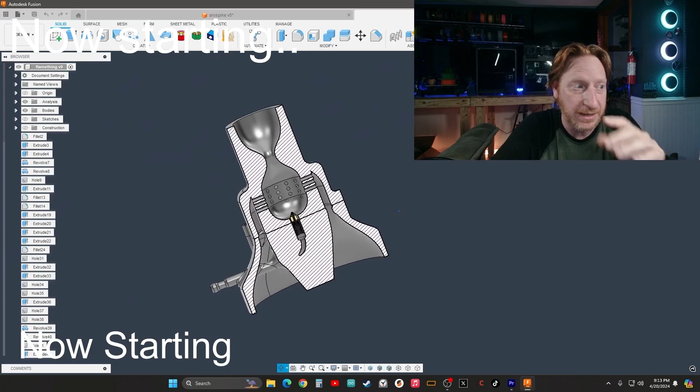Nozzle heats up and the plastic it flows. A creation takes form as the live stream goes. Heart of a maker with a tech-savvy show. Designs in the making, see the hotbed aglow. It's shenanigans 3D on the digital stage. With each layer printed, he's the maker. The mage.

Let's start the show. Layer by layer, we watch it grow. A twitch in time with shenanigans flow. Chaos reigns with a fiery glow. We're live. We crash.

Watch closely as the filament spins. A wild ride where the line between fails and wins. Accidental art when the plastic rebels. Shenanigans 3D. He's breaking all the levels on the edge of tech. Where the sparks may fly. In the streamer's den, there's no limit to the sky.

Every stream's a gamble, roll the fiery dice, pushing limits, bending rules, not one to think twice. Heartbeat pulses with each print he creates, while the chat's wild wonder and suspense they wait. Rising with the flames in the shenanigans game, printing out the future, no two prints the same.

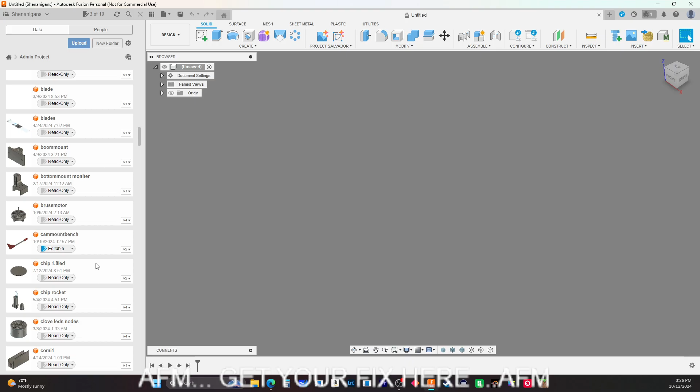Let's open up the chip itself. Can't remember what I called it... Chip 1.8 LED, no, that's not it. I made this, I think this is it right here: Chip, final V3 chip. Is this it? Yes, it is.

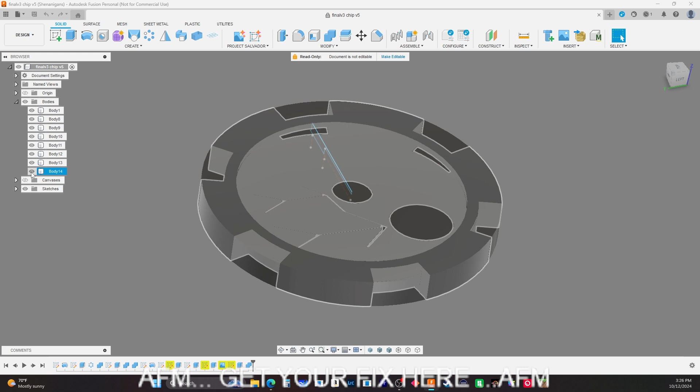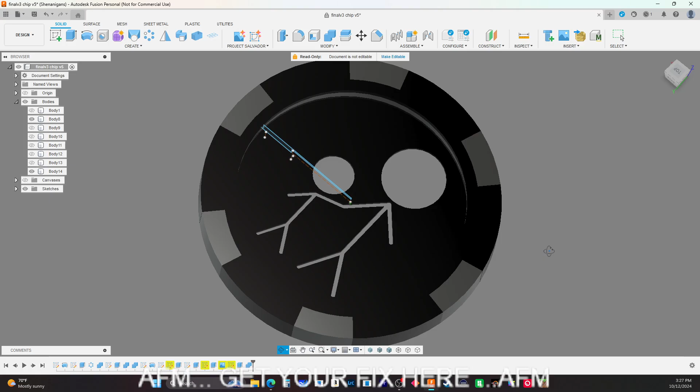I did my thing internally in the program, so we'll just ignore that. The one that I will be putting up will not have this in here, it will be solid for y'all. Okay, actually, let's do that right now. Let's do it.

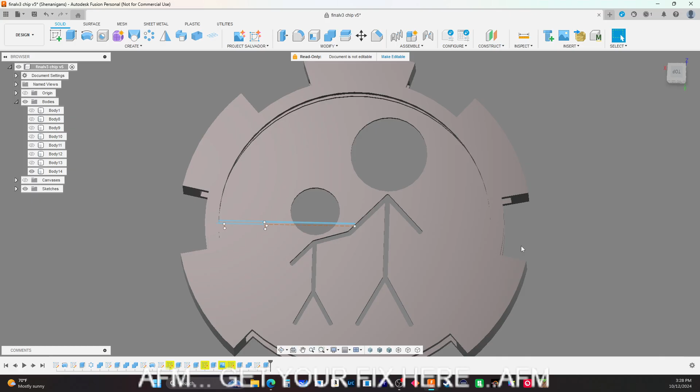What the heck? Oh, I know what I did wrong. I forgot to include all this stuff.

There we go. There we go.

It's a lotus flower candlelight holder. Put a copper cup as a buffer.

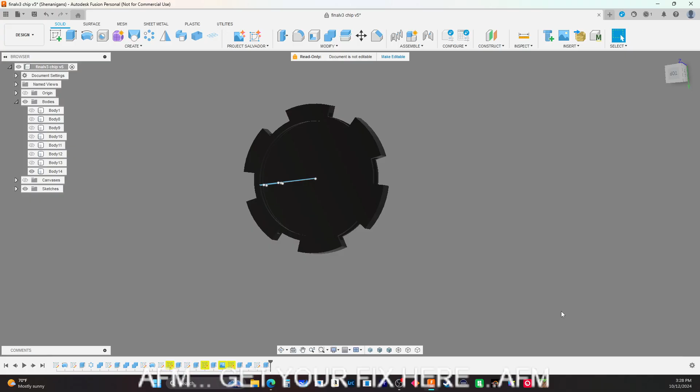Nice. All right, so this is the main structure of the chip. Notice how it's all hollow and there's a bunch of voids in here. That's for a reason. This is your dark. All right, so this is your black.

You got your Revo on your Versa. That's a pain in the ass.

Yeah, came with no instructions. Don't you love that? But then again, would you have read the instructions if it did? I probably wouldn't have.

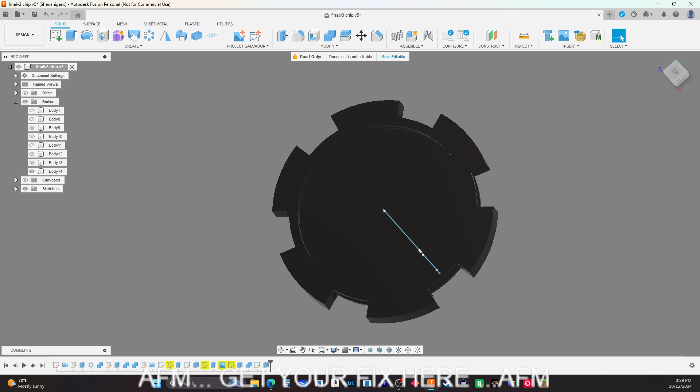Why is my face not... Where's my... come on, button, work. Click. There we go. Okay.

So this part here that you see, this is the dark one. I think this is like a 4-hour print. There's only one of these in existence, minus the guts that I have.

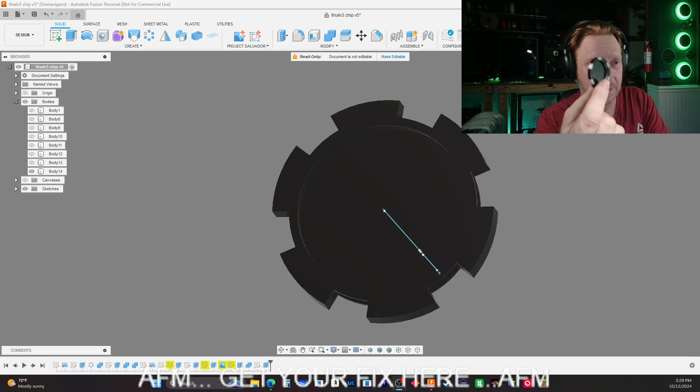K2 Kevin is the only one that has one of these. I tried to get one done for MakerDeck to hand to Pez Liz, so I got MakerDeck Pez Liz chip, but I just didn't get it done in time. I'm a little bummed out about that, but hey, next event, right?

So yeah, here's another one I did with a purple, and I can't remember what I used for the dark, but what you see up here on this, they had a disable thermal runaway, all because it's a PTC thermistor.

Oh well, it's up and running now, right? It's good. A friend of ours that comes into your chat just bought a new Prusa XL, and he sent me a picture of his first helmet print on it, and it keeps getting layer shifting on him. Like it gets up so high and it's shifted quite severely.

I keep telling him it's his belts. Something's either rubbing or something, because he sent me a sound of it, and it sounds like somebody's playing like a cello when it's going off. So something's going on, yeah, layer shifts.

The last layer shift I had was on the Sovol, and it kept layer shifting on me, and I was like, what's going on? And I found out that I'd never tightened my belt. My belt was like very, very loose. So they're all tightened now, and it's been printing like a charm.

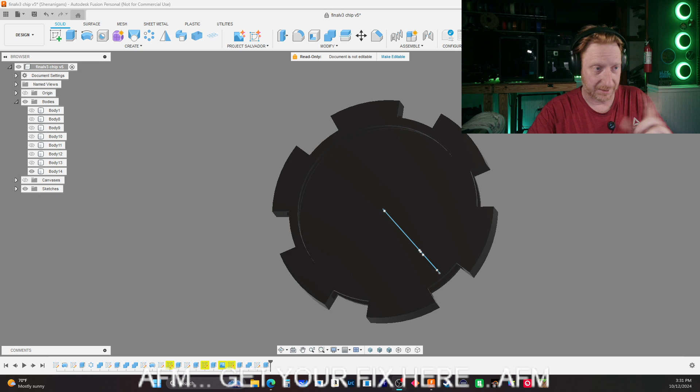So yeah, this is the black, you can use whatever color you want. I used the PETG on this, the black PETG, and the light doesn't shine through. The light does shine through on this one.

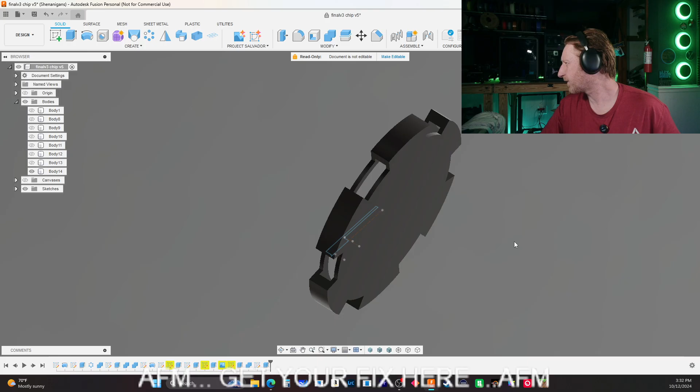Now the chip that you see Kevin squeeze in that little clip he did, the whole chip lights up, because I used a filament that I did not realize was transparent. There's a funny story about that filament, but I can't remember what filament this is.

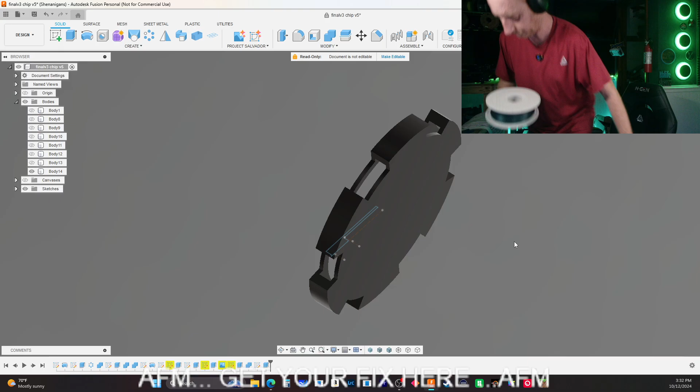This is the PA Galaxy. I did not realize that this stuff is slightly transparent when you print very, very thin with it. So yeah, the chip that K2 Kevin has came from this spool right here.

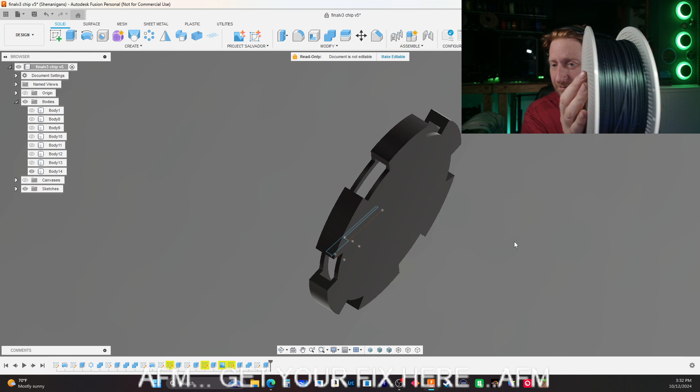Oh, awesome. This is if any of y'all were lucky enough to get a chip from Pez Liz, or anyone that was made by Pez Liz, she used this filament. And I fell in love with that filament, and somebody in this channel sent me this filament.

And then I ended up making the light-up maker chip out of that filament for K2 Kevin. But like I said, when you squeeze on it with that one, the whole chip lights up, so you can see right through it. Yeah, Pez, I love that filament. Love that filament.

So this is the base. We need this, okay? And then we need the other body, which is this one. This body is the actual light ring.

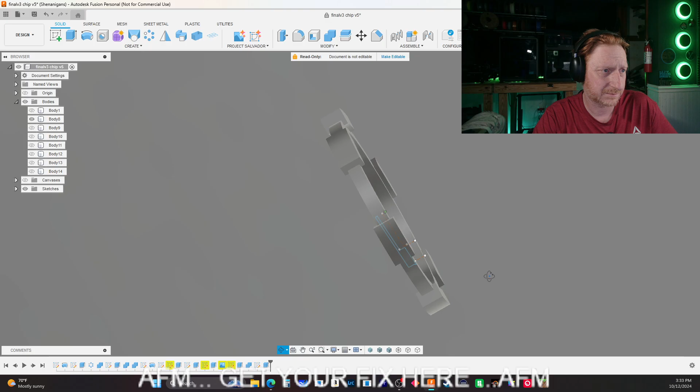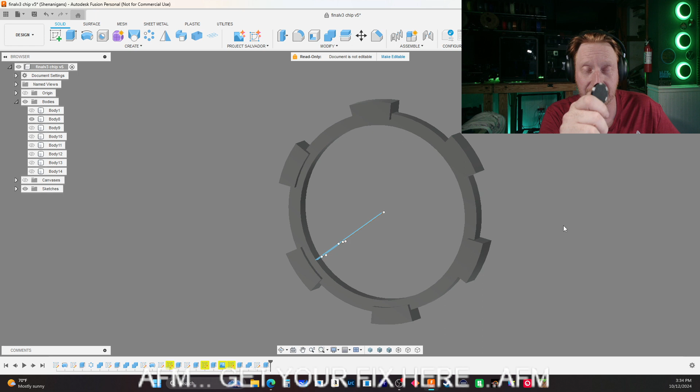This one, the one I made for K2 Kevin, I used... let me find this. Do I have any more of that filament left? I think I do, actually.

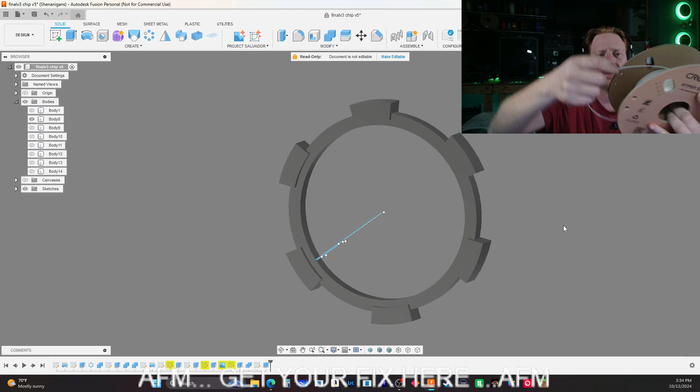Is this it? Yes, from Creality, their Hyper series. I use this for my light boxes. It's very, very opaque, like it's very white. It's Hyper PLA white, but when you print with it, it really allows the light to shine through on it.

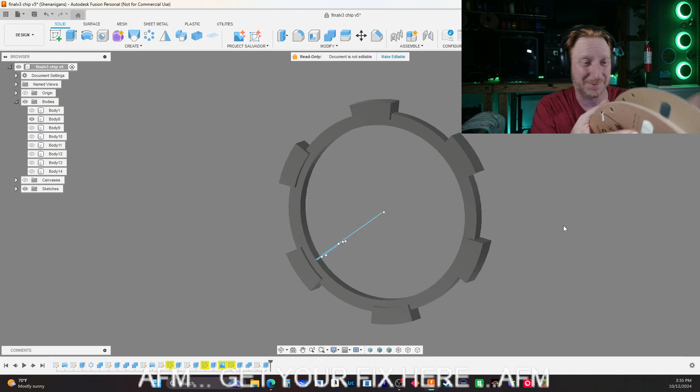And this is great for light boxes. I've used a bunch of different ones. I'm no expert, no, I'm no Pete on the light boxes. Pete is just a master on light boxes, and to be able to see his creations in person was just awesome.

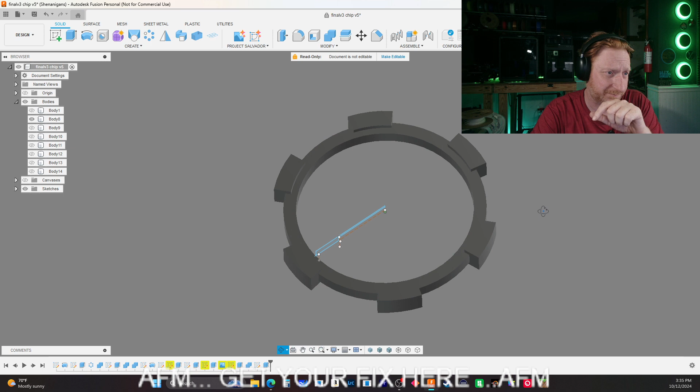But this ring is the key right here, okay? And then the other thing that you need, do I even have it on here? Yes. This is the cap.

Now if you look on the cap, we got this little lip right here. Well actually, here, look, you can see how transparent that is. This is that galaxy from Bambu Lab. You can see how transparent that is.

So that's why when he lights it up, the whole thing lights up. I was not expecting it to happen.

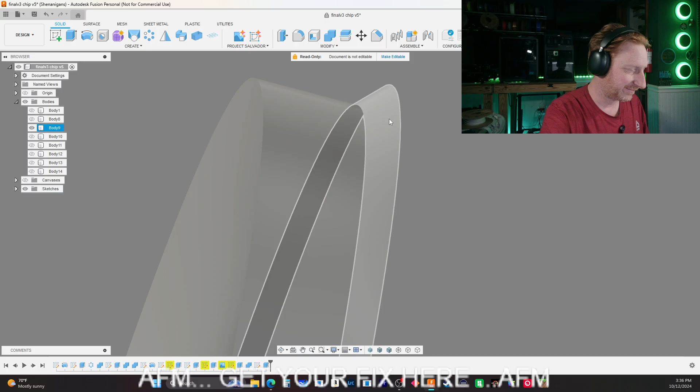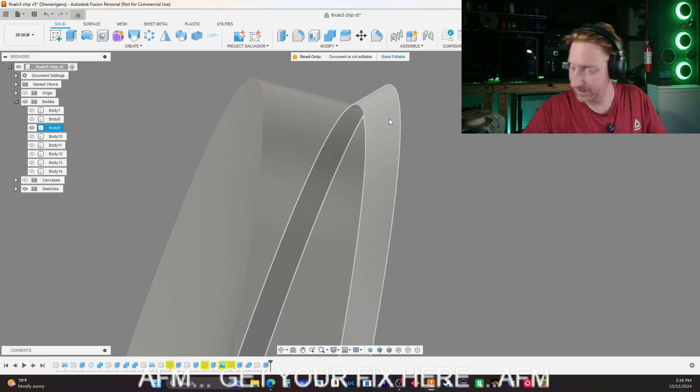When do we get a burning maker chip? I got something, I have something in the making. Yeah, I got something in the making. It's going to be a challenge for me, I can tell you. But I got a new maker chip in the making. Hopefully I can get it done for Murph. But it does require some coding.

Okay, so this little chip, this little flapper thingy here is very, very important. That's what locks the lid. That's what locks the cap.

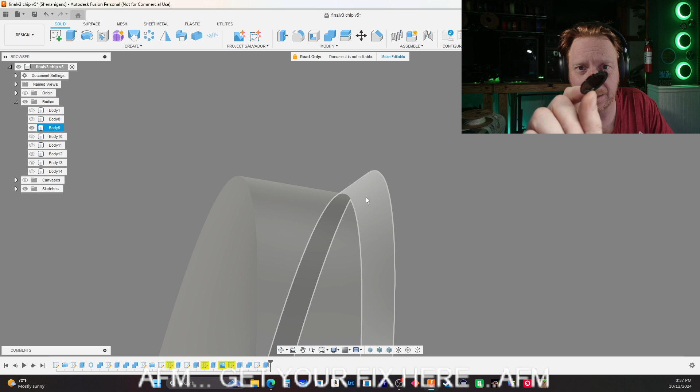Okay, here's the cap. Will it fit on this one, or did I? No, it won't. It's what locks the cap in place on top of this. It will go in here right now because the battery's not going to come back out now.

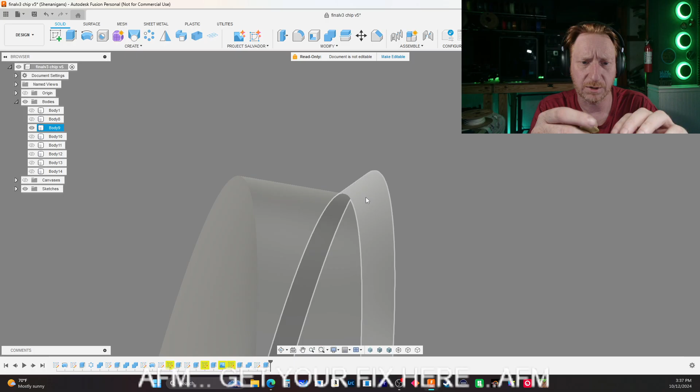There you go. But all you do when you get all these printed, we'll show one in Bambu Lab. You put the circuit board and the LEDs inside. You can glue it down.

You can line up the LEDs with your transparent stuff. And the cool thing about it is we have that transparent ring going around the whole inside. Okay, you put your battery in. Obviously we can't put this battery in because this is not the correct battery. I don't know what I did with the other battery, and I need that.

But you take the cap and you make sure that you can see how that is, there is a dent in there, right? So the battery will actually fit right inside this little cup, and that's important. The battery will fit inside this cup, and this little, see if I can turn, there you go.

That little gap right there, that gap is where this wire goes across. So there's a spot for that gap. This is very, very thin in here. This is only like a 2-layer print. Same with this, this is only a 2-layer print. There's only 2 layers on here. And that's 2 layers with all that.

But this, I have a bunch of these. I'm hoping this is the correct one, but I think it is. Yeah, oh no, this is the smaller one, but you'll get the idea. It will snap in place.

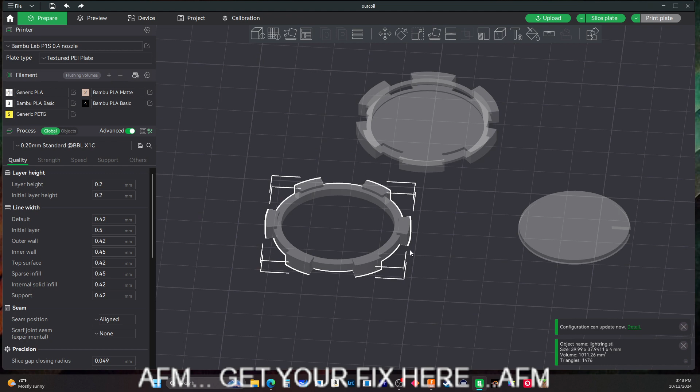The nice thing about this is if you run an AMS or MMU, you can do your logo and your QR code face down. Make sure this is centered. So we're centered on that ring. This is the light ring, we're going to center that. And then the cap is just going to stay off to the side.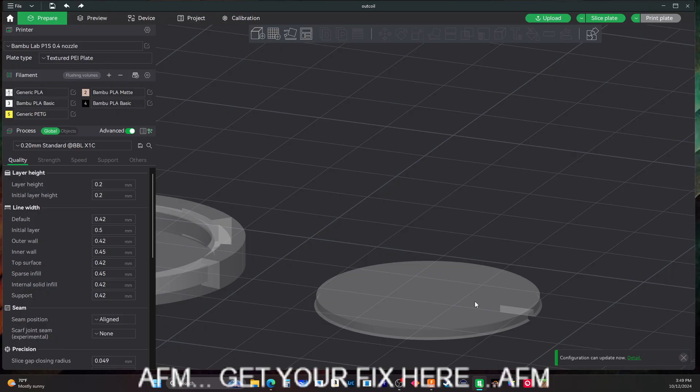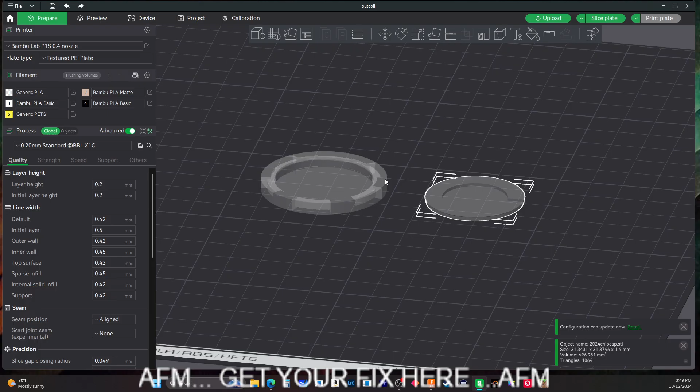Okay, make sure the cap is printed this way. You don't need any supports or anything for this little edge on here. Okay, so you want the flat side down—no, the QR code side down on that little cap. I am working on one that is going to be, like I said, printable for those of you that do not have an MMU system.

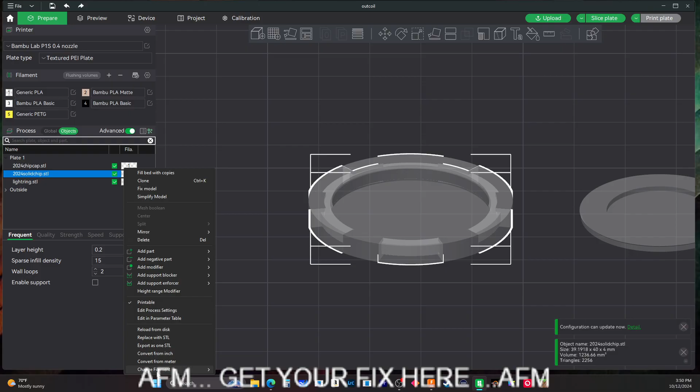Now, just like all the other chips, we are going to go into objects, our solid chip, which I named solid chip. It'll probably be different when I upload them. The solid chip, we'll change it to whatever color, we'll say black. We'll leave our cap as the same filament. And then our light ring, we're going to change it to this one, our transparent or clear filament, whatever you use that will allow lights to transmit through it.

As you can see, the ring here, that's the important part, because these LEDs are not facing outwards, they're facing straight up. So as much light as we can possibly capture is what this ring is for, and then it will transmit it out.

The next version I'm making of this, the one I've been working on that's going to be mass produced, the LEDs will be facing outwards. Okay, that's a whole different type of circuitry than what we have on this. It's somewhat the same, close to the same thing, but instead of having an outer ring, our outer ring weaves, and then there's a smaller pad on the inside.

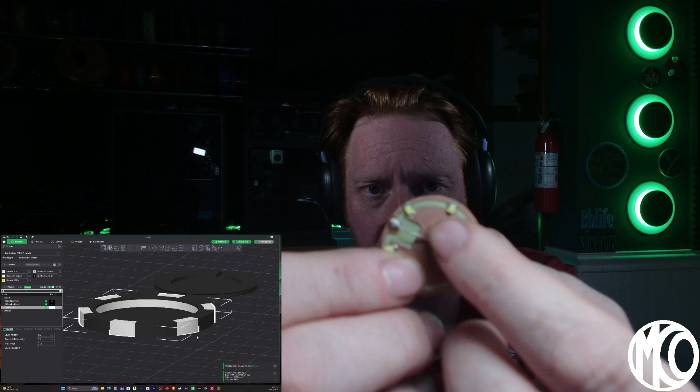But they are all getting custom made for me from PCB Way, and I'm using a very, very thin flexible circuit board, and I think it's only like 0.3 millimeters, something like that. It's very, very thin, flexible, and it will actually go in here and be glued down.

Glendon, how are you doing, my friend? We're going over the maker chip. This is the heart of it right here.

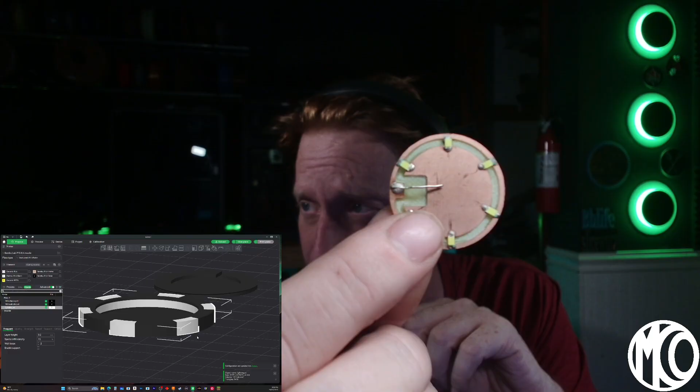The one I'm going to mass produce, once I get those in from PCB Way, will actually have a coating over top of this, so when we put the battery down, we're not worried about it with the new style I have. The LEDs will be the same LEDs, but soldered sideways and firing outwards, giving a bit more light output so we can do deeper colors like this. When we tried it with this one, it wouldn't go through that dark color. It would go through this one no problem, but not that dark one. But with the side firing LEDs, most likely it will.

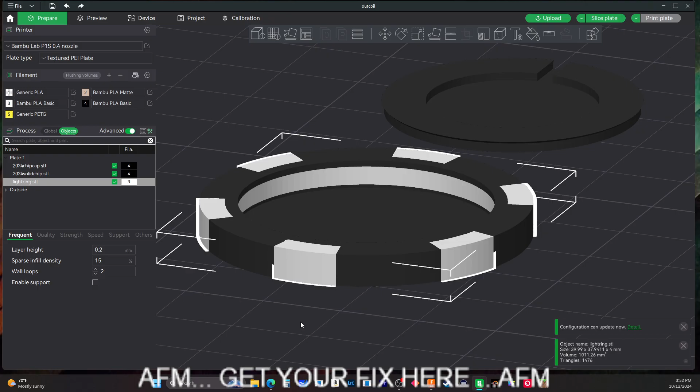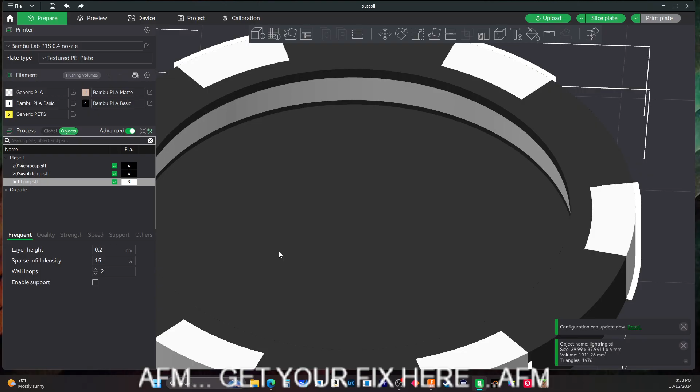Alright, so just like all the other chips, we're going to take these, minus the cap. We'll get rid of the cap for now.

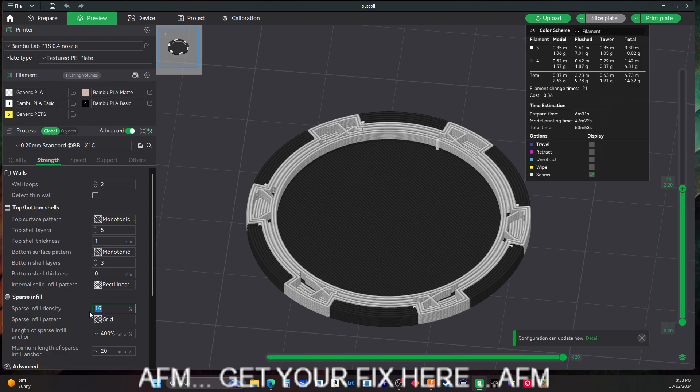I played around with adding sugar to my resin once, and I added sugar and potassium nitrate to a vat of resin once. That didn't turn out too well. It burned like a son of a gun. Yeah, it didn't turn out too well. It made a bunch of white smoke. I did not want to stand near it.

So we'll slice it to double check it, and let's turn off our seams. And that looks good.

This is our light ring. But you can see how thin this is right here. This is only like, I think it's only 2 layers. There's, yeah, 1, 2. Yeah, it's only 2 layers. So the center of this is only 2 layers.

Yes. Same here, it's only 2 layers. Same with the cap here. That's the center of this cap, only 2 layers. That's what I had to do to get it down to 4 millimeters.

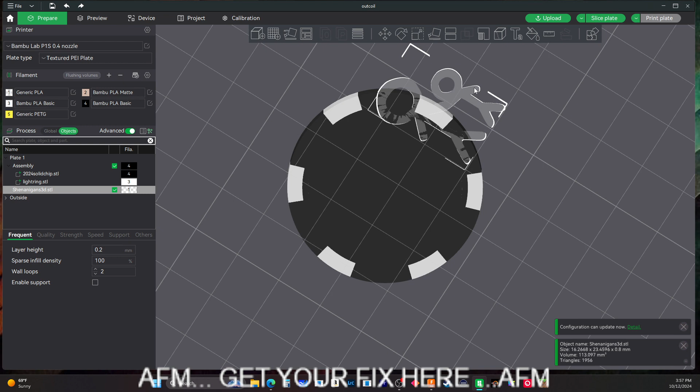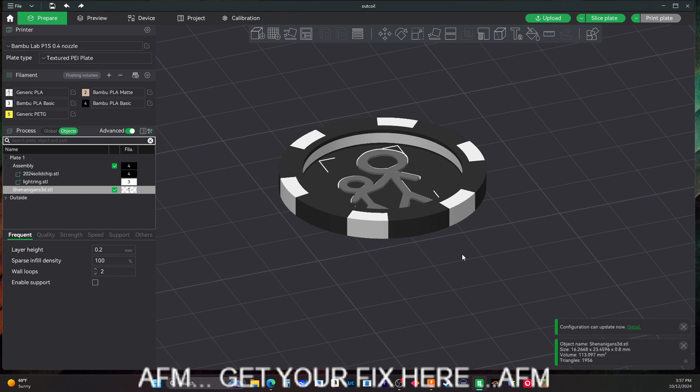So this drawing right here, go back to the big screen. This stick figure was actually made by K2 Kevin. So K2 Kevin did make a chip for me. I don't have one, I had one printed, I don't know what happened to it. But K2 Kevin did make a chip, and this was his design. I used this on some of my chips, and then my fire chips, I did something different. But you will need to make sure this is not sticking up through.

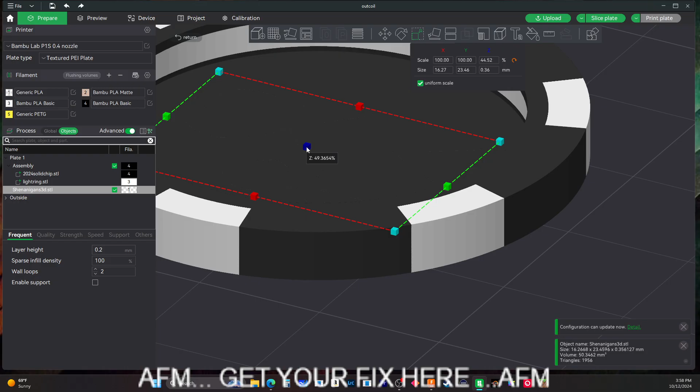So if we do the scale on this, you can take it up 2 layers. Remember, it's only 2 layers, so you can take it up 2 layers. But we'll just keep that down where it's at right now.

And if we select it, we'll make sure you can change whatever filament you want. I'm just going to do the white just because. And then we'll merge this in with our assembly.

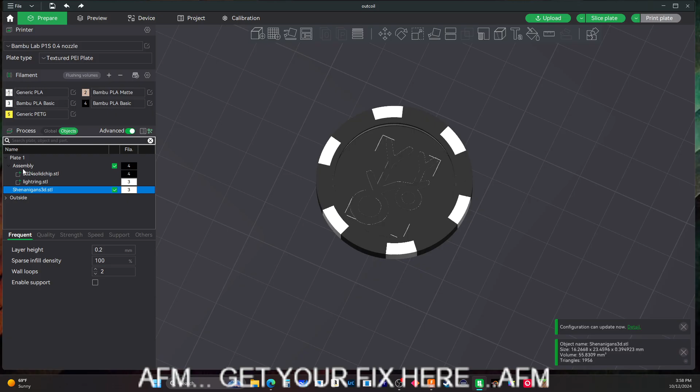And there is our logo in the chip. So from here on out, the chip is done the same way as K2 Kevin explains. It's a normal chip from here on out.

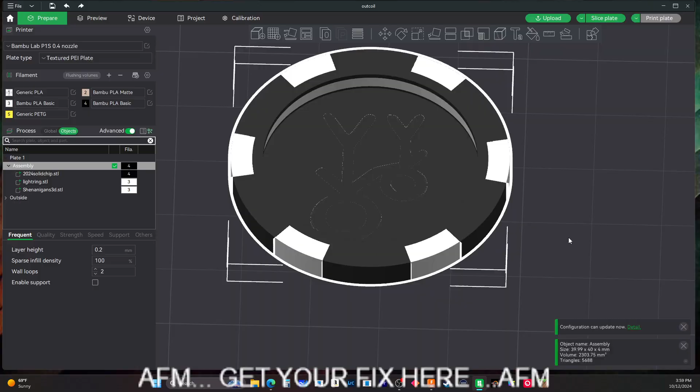Our main goal was to get these two, the light ring and the outer casing, lined up and merged together. That's the first step. Once you do that, the rest, as far as putting your logo in place, is the way K2 Kevin explains it, the way everybody's been doing it. Same with if we bring in our

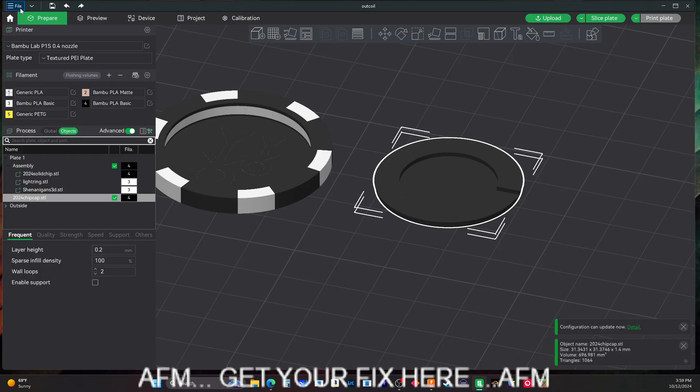Cap. Make sure that it is the QR code side down. And our cap color is going to be black. And then we will bring in our QR code that needs to be scaled.

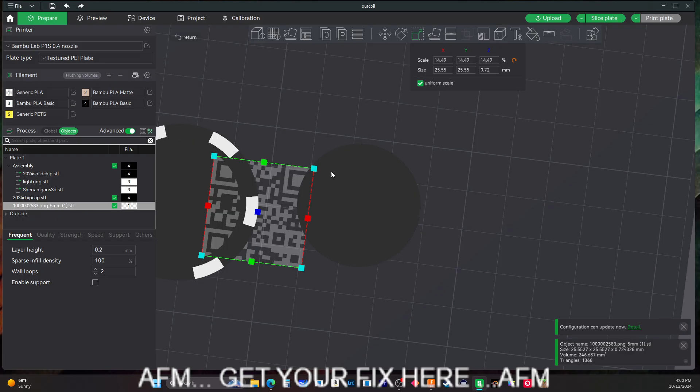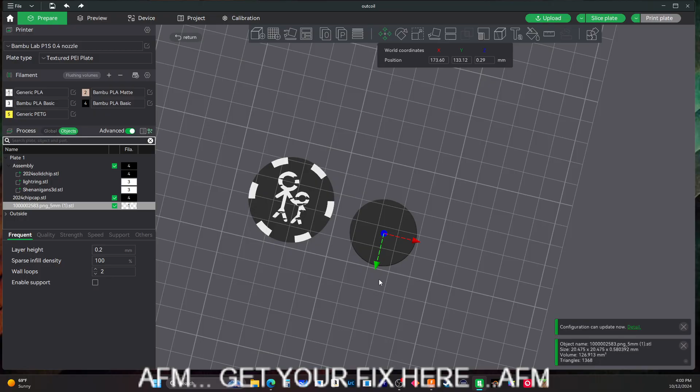That looks to be about even, I guess. Our QR code needs to be scaled again, and it needs to be scaled on the Z. We cannot have this sticking out.

So we're good there. We will select it, and change our filament to number 3, the white. And there's our QR code. We need to make sure our QR code and our chip cap are merged together.

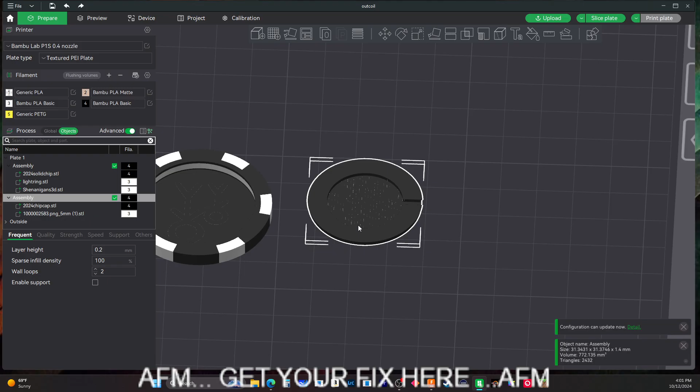Okay, so they are. You can print this separately, or not. I think I print mine separately, to be honest with you, from this. But I think you can do it, we'll test it out. I'm pretty sure you can do this all in the same plate.

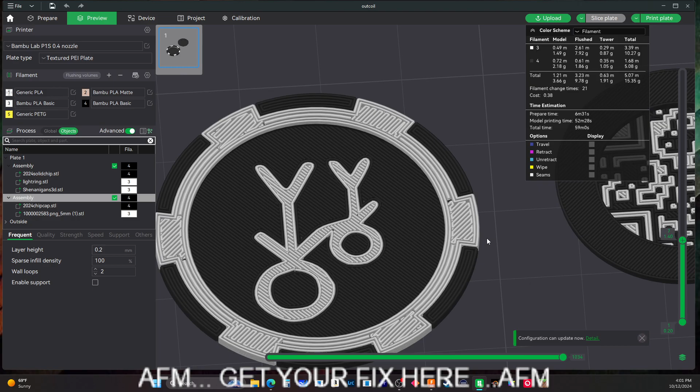So there it's sliced. Yep, that's all on the same layer, and it is not exceeding those 2 layers. Let's make sure our QR code is not exceeding 2 layers. There's 1, 2, and it's not. It's good, good deal. So there it is.

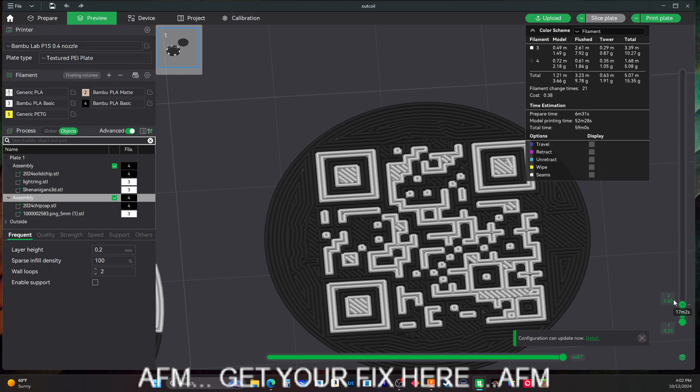That light up maker chip is ready to print. How long is this thing going to take to print? Yeah, this will take an hour to print. And that's how simple it is.

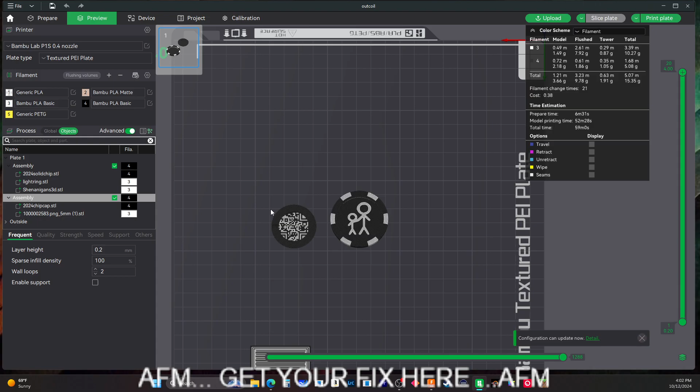So you have 2 assemblies in here. The first assembly is the black, or whatever color you choose, right? And then we have the white, which is the light ring, this, and then the outer spokes. And then you have your logo, whatever you choose for your logo. You gotta make sure that your logo does not exceed 2 layers. And I am printing at a 0.2.

So that's it for that. And the same thing with the cap, you gotta make sure that it is QR code side down, and that this little guy right here is upwards.

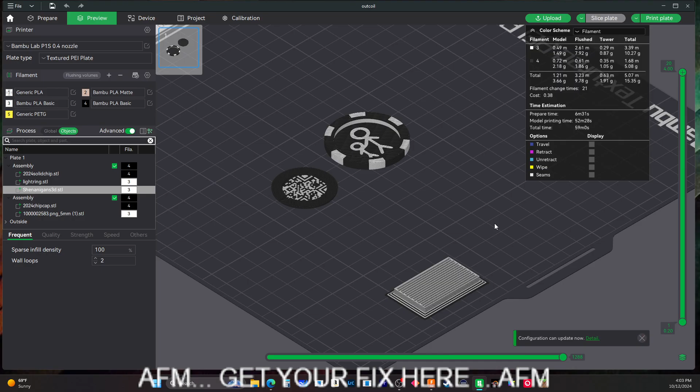Once that is done, you get this - was like I said, this was CNC'd, but I will provide the SVG files so you can use it. You can etch it, however you want to do it. But this was CNC milled by TechJeeper, and this is your little lineup for 6 LEDs.

You can use, I'm trying to improve this part right here, the little wire. I'm trying to improve that with version 2.

So, yeah. And then when you get your battery, you gotta take a little teeny piece of tape. And I wish I had that battery. I was certain that was like right there. I probably put it in a box while I was cleaning. That's what probably happened.

But you take a wee little teeny piece of tape like that. You just want the corner, that's all you want, and you just kind of fold it down. You can get technical and cut it if you want - I didn't, I just folded it down. And all you're doing is protecting that corner from causing a short.

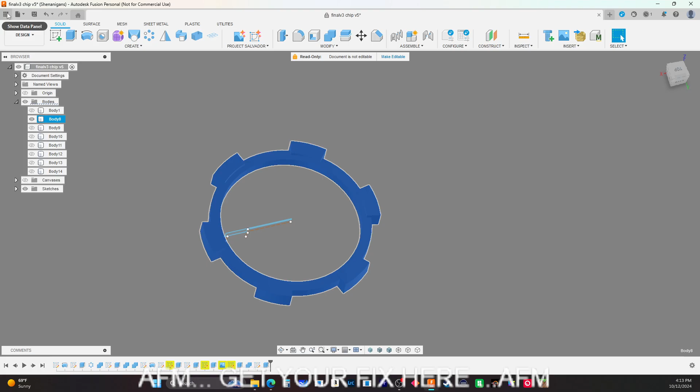I tell you what we should probably do first before we upload anything - let's get back into our maker chip. I hope I saved this. There is a very good possibility that I just printed this out for the heck of it. Now I printed this out and I didn't save the file - I printed it and just sent it.

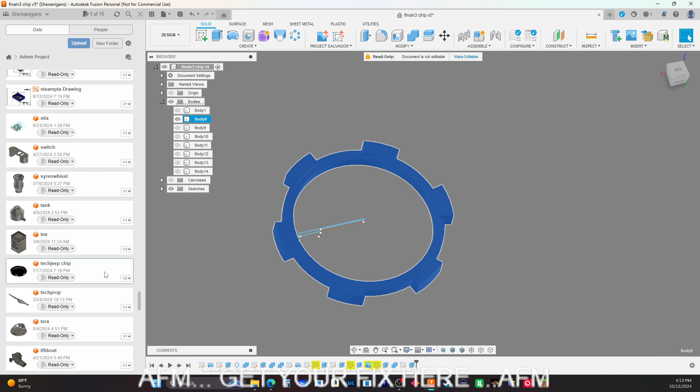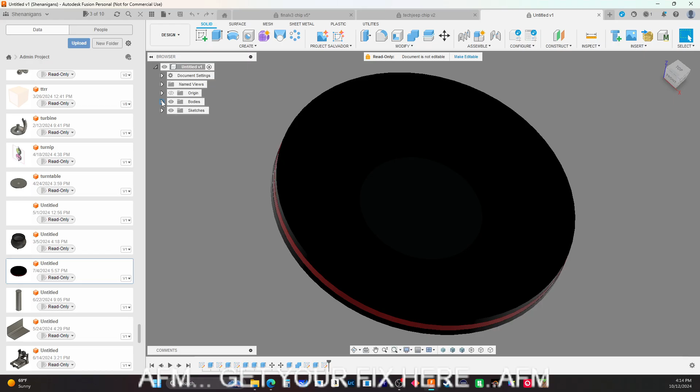I'm looking for that little yellow thing. Might have it - this one I made for TechJeeper, it might be in here. Nope, they're all... this was a test print I sent off to TechJeeper because TechJeeper was involved in all this. There was a maker chip right here. Here's a maker. Here's a... this was the start to... this was the start to one.

Everybody's probably on a streak after last night's episode. We might have to make a new one of these. That blue box, huh? Yeah, that blue box is pretty sweet.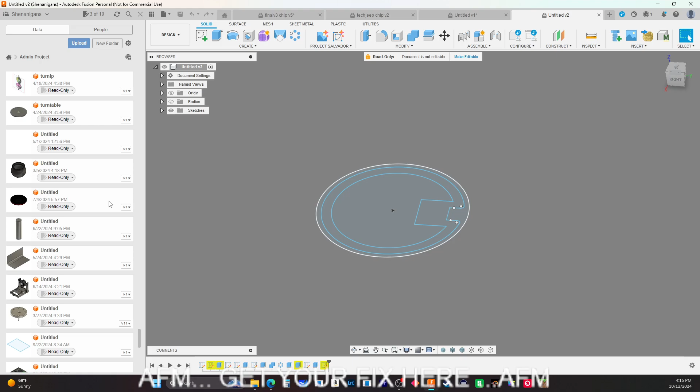Okay, so we're gonna have to make one of these things. I don't have it in here. I do this a lot. What's in here? Nothing. I'll make something real quick and just won't save it because I only need it for a one-time use. So we will make one real quick.

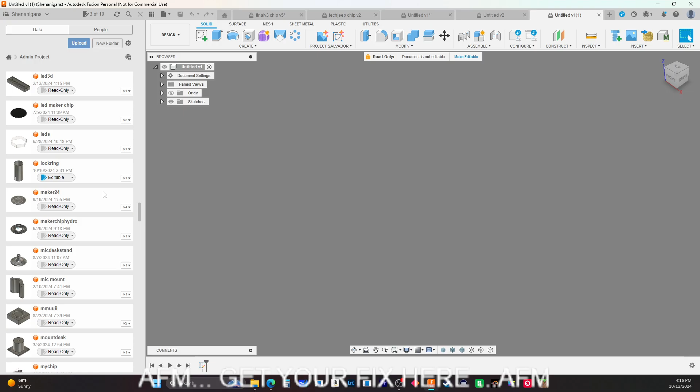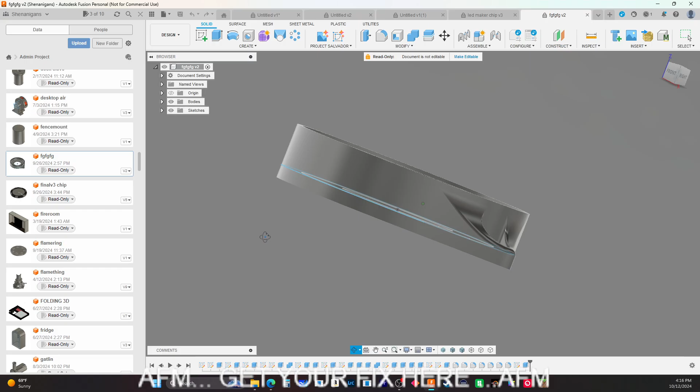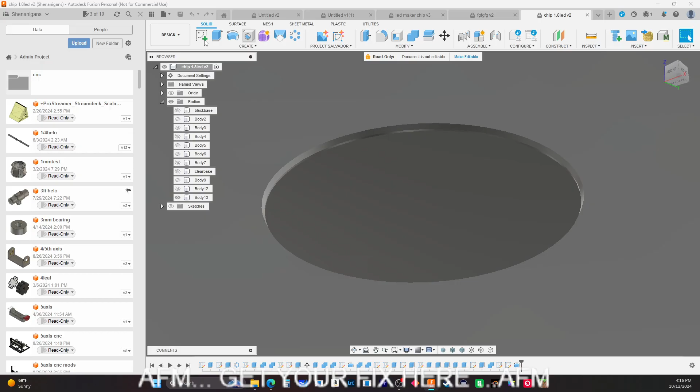Maybe this might be it. Oh no, that's the lid. What the heck is this? FG, what am I doing here? Oh, I know what that was, that was one thing we made the other day. This might be it. Maybe. No, this was the start of another one. If I don't see it by the time we get to the top, we'll just redesign it. Yeah, I don't see it, so let's redesign it. Close this, close that.

Don't save it. All right, so the first thing we need to do is get the measurements. This is real simple to make. We need the measurements on it, and then it takes a lot of work to rebuild things, which are a bit of a hassle. Well, this is easy, but I know what you mean.

Where's my calipers at? First thing we need to do is make that the size of a chip. So this is the size of a chip. So it's 40 millimeters.

Tell you what I'm gonna do, I'm gonna go make myself a drink real quick. Not that kind, no, a non-adult drink. I'm gonna go make myself some lemonade real quick, and I'm gonna let my dogs out. I need to let my dogs out. So I'm gonna let them out, make a drink, and I'll be right back. That's not cheating.

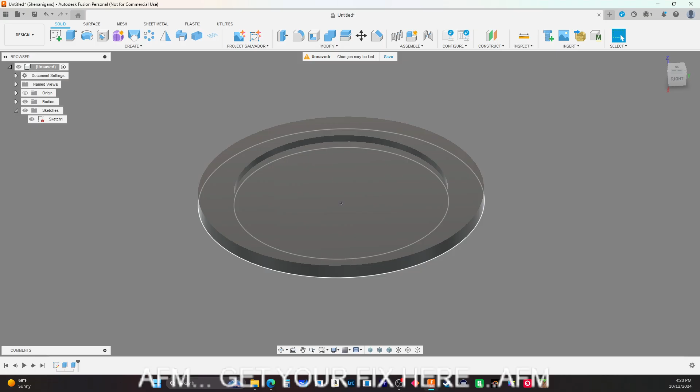I've tried a bunch of different mixed drinks because I'm trying to watch spending and all that stuff. And I found this mixed powder, it's store brand but it's sugar-free. This pink lemonade, sugar-free, and it's like this big container for like $8. And it usually lasts me like 2 weeks. I'll take a 2-liter bottle and mix it all up, and I'll take it to work with me along with my coffee for my thermos. But it lasts about 2 weeks. $8 for that? That's all right, I think it's a pretty good deal.

I'm gonna create another sketch right here. So now we're going to do these little slots. And the slots are 7mm, and I think I made them, what did I make them at? About 2.5.

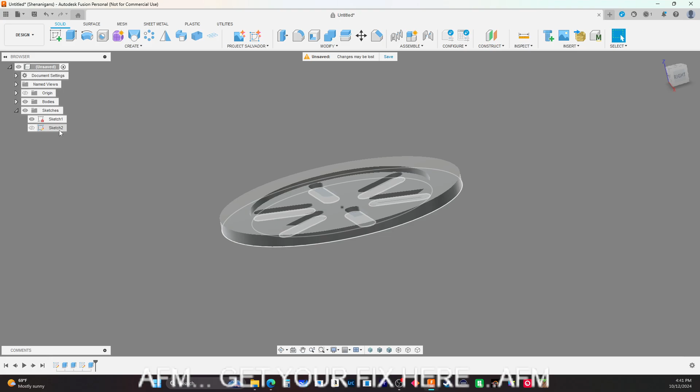So let's try to reopen that. Where was that? There it is.

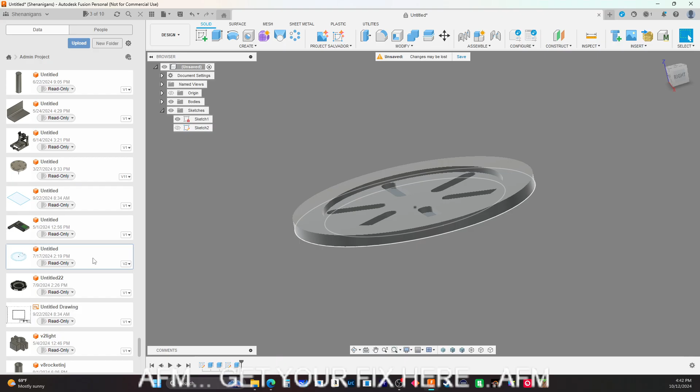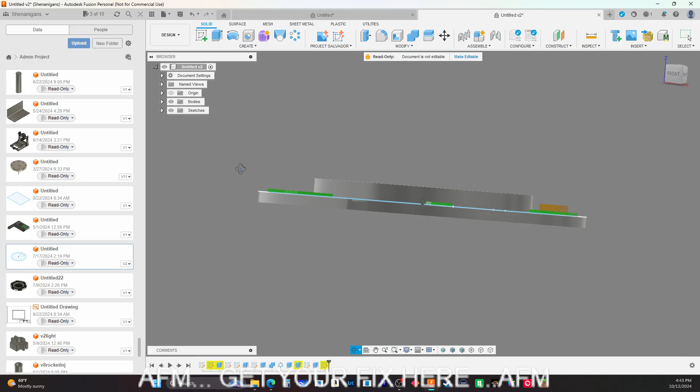We need to take this. Oh, this is when we're actually making the chip, designing the chip.

See, save as a DFX or DXF. Can we export this? I wonder if we can export this as a...

Try to save it again. I'm gonna save this in chips. Yes.

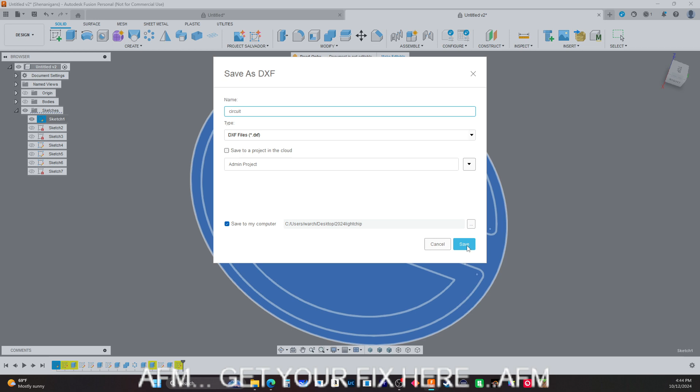Okay, so let's try this. Let's try to bring this new one I just saved in here. Nope.

All right, I'll tell you what. I can add more files to this later, right? I can update it, I think so. Files will be grouped as a single model.

Did I click multi-part? Oh crap, what did I just do?

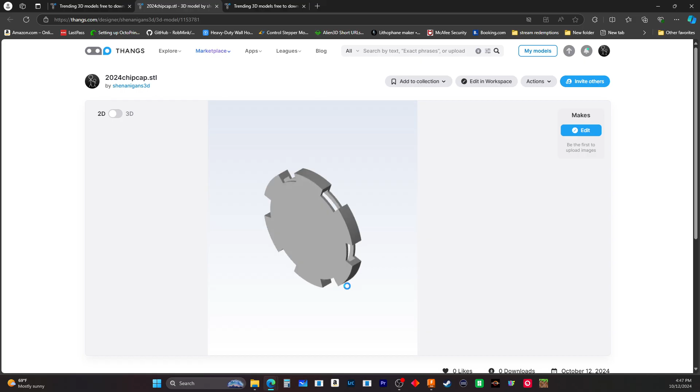See, they're all misaligned. How can I fix that? It's all misaligned. I don't have any images for this.

I should put my video on it. I don't have any, maybe I shouldn't upload this yet. Yeah, I don't think I'm going to upload this yet. I'll tell you what I'll do. I'm going to put this all on my Discord. Yeah, that's what I'll do. I'll put this on the Discord.

And then when I get the video done here in a few days, and I get my pictures done and stuff for my thumbnails, I'll use all that stuff and upload it. That's what I'll do. But I promised everybody that those in my Discord and my chats will have access to it. And then when I get my video done, I'll put it up on all the repositories.

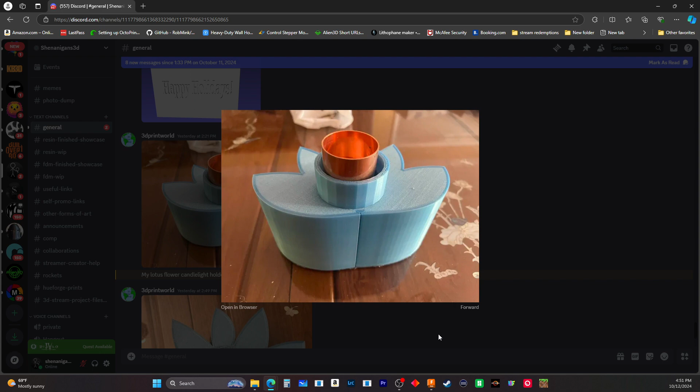Yes, a tea light holder there. Good job on that. And then you have a Christmas mobile reindeer facing each other. Nice. And there's the STL for it.

Oh, Cruising Grill, you had some Northern Lights. Awesome. Yeah, scratch that off my bucket list.

Okay, so we're going to put this under... I did, didn't I? I thought I created a... Yeah, here it is. Here it is. We created this 3D stream project files and random memes.

Because somebody, we just opened the thing up and somebody filled it full of memes. So I was like, well, we got to keep it now. Okay, so we got that uploaded, right?